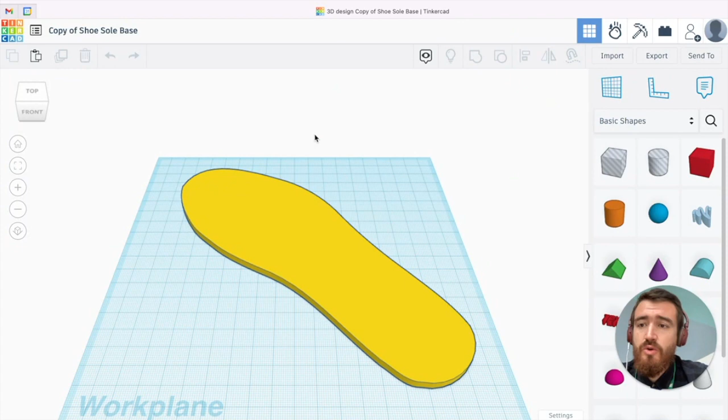Now we are going to be redirected to your Tinkercad program. So what do we see here? First we see the sole. If I click around this navigation box, I can actually move around. Normally, we're going to be designing looking from the top perspective.

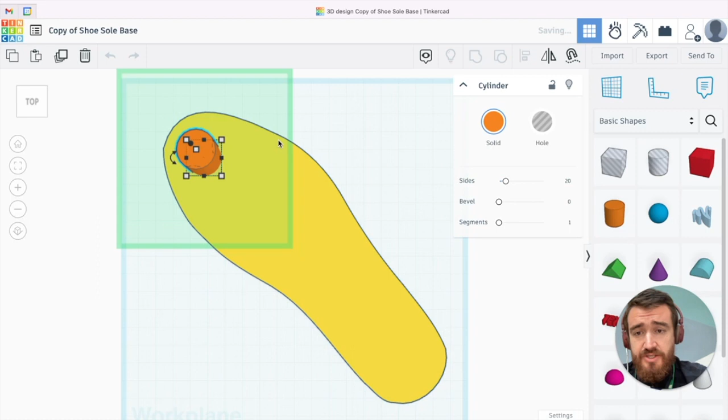So I can start adding different shapes. I can start, for example, adding these cylinders. Remember that here, when you click, you get the arrows. You shouldn't change the shape of the base sole, but you can change the shapes that you're adding.

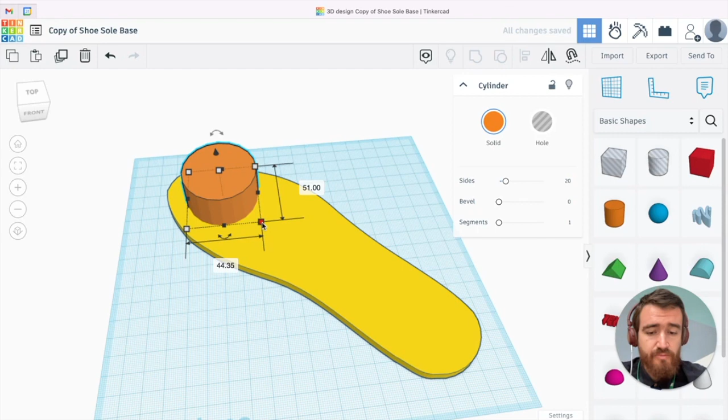So here, if I click, I can scale it up and down. If I want to scale it from both sides at the same time, I can just click Shift, and then it's going to be growing from the height and width. I can also move it like that. Or if you want to be very clear with my dimensions, I can just go ahead and type 15.

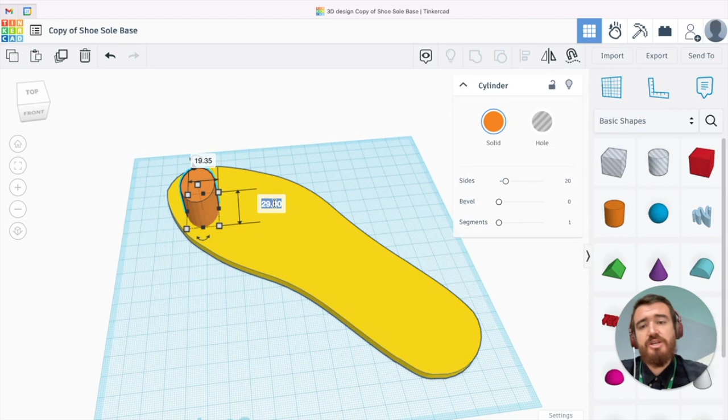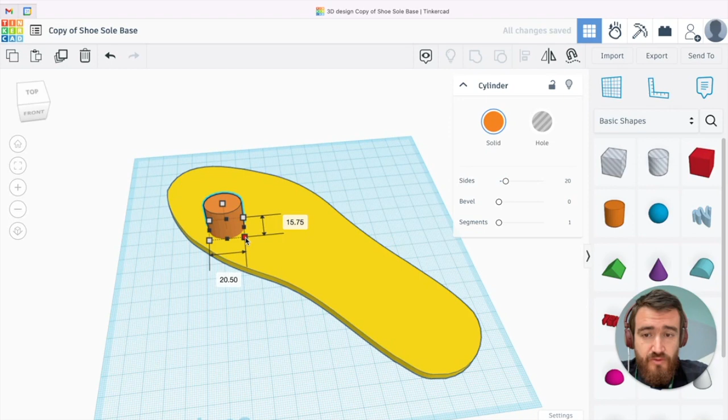Now here I can also change the height. So here I can do the width, and I can also change the height of my object. Again, I can just say 3. The base sole has a height of 4.22. I can make it even smaller, it's going to be 3, okay?

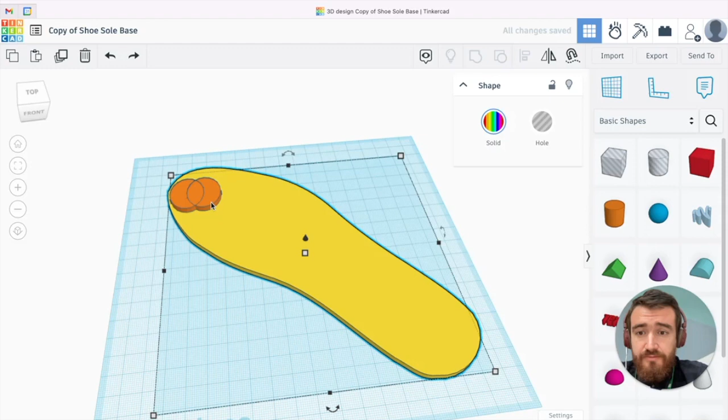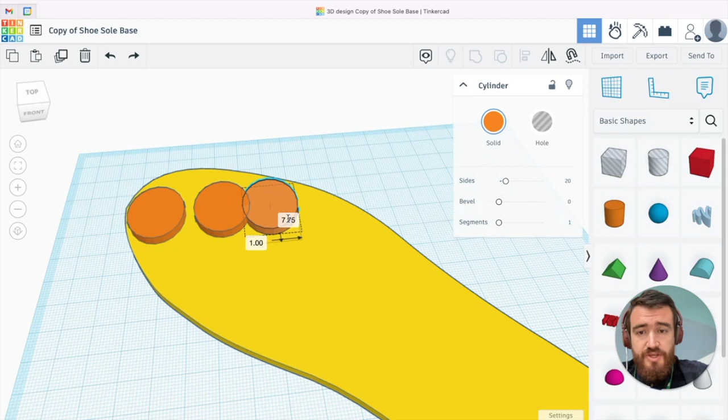And now I can start putting all the objects around. Let's say I add a lot of these circles, a lot of these cylinders. I'm going to move the cylinder around. Now, I can also move it with the arrows. One thing I can do, if I have a lot of them, is align them with this tool. So let's say I put it here. I can click one object, shift the other object, and then go to the align tool and align them here, or here, depending on how I want to align them.

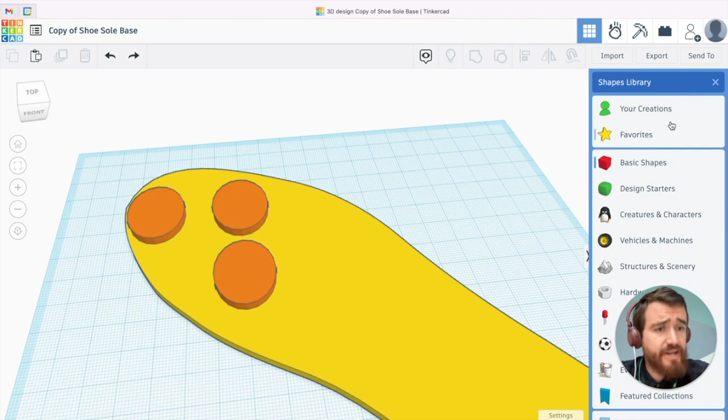Again, here on basic shapes, on your right, you have basic shapes. You also have this tool called the scribble tool. Here you can do a custom pattern that you draw, and then done, and you get it there. You can also rotate the scribble, change the height, and also scale it.